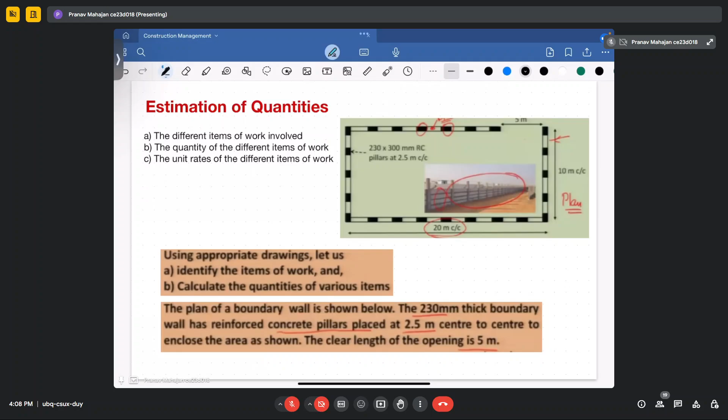So the clear length of the opening, so that a gate can be provided, is provided as 5 meters. So this is an illustrative example that you have covered in the current week, or the just-completed week. If you have seen all the videos, you must have seen how the estimation of quantities related to that is carried out.

So these are the side views of the boundary wall that you can see. Wherever you have a masonry wall in between, this is the sectional view of the masonry wall, wherein you can see that you will be having a 230 thick wall on which 15 thick plaster is provided in the ratio of 1:6. Then you have bed joints that are also provided with mortar in the ratio of

1:3. At the top, you can see this angle section in which four holes are provided. In these four holes, the barbed wires will move from one section to another, and then it proceeds further. You can see the foundation also. So this is the foundation that is provided.

In this, the bottom layer is PCC in the ratio of 1:4:8, over which you will be having the brick masonry foundation, with a first offset of 25, and then a 100 offset is provided over each step. So this is the cross-sectional view of the boundary wall, from which the estimation of quantities will be carried out. Another sectional view available for you is the sectional view of the RC pillar

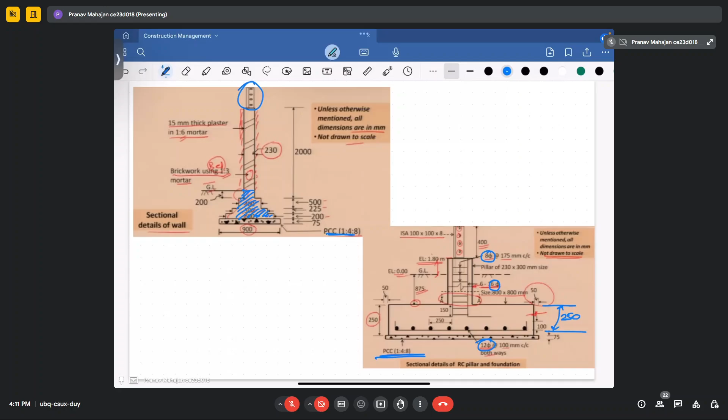So additional information provided to you is that, for this project, additional features are also mentioned in the drawing. It is mentioned that excavation is carried out by allowing 200 mm on both sides. So you must see that 200 mm should be provided on both sides of the section.

Whenever you are constructing a footing, an additional 200 mm is provided so as to provide a pathway for placing the PCC and to move the mason from one place to another in that section, so that the work can be carried out easily. Whenever you do the excavation work, you will not do exactly whatever specification is provided. You will do certain additional things, and then you do the backfilling, so that the work is done precisely and efficiently.

So the additional cost involved in carrying out such work is also included in the item of that work. It is mentioned that all the concrete work should be M25, and these pillars should also be plastered. Another thing provided is that you will have footings for the pillars of 800 by 800 mm. A clear cover of 40 mm is to be provided, and the original and final ground levels on both sides of the boundary wall are the same.

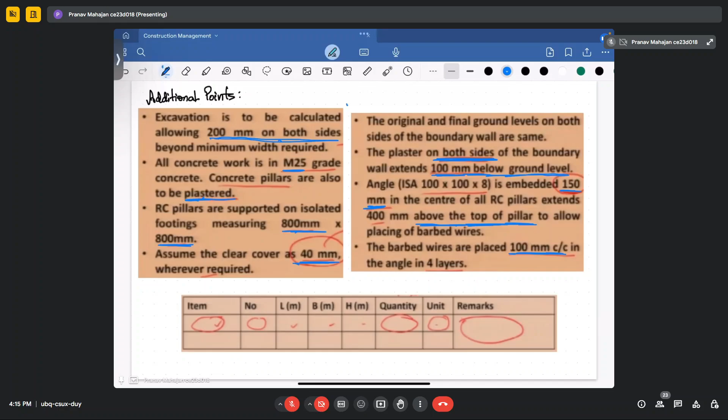So these additional features will help us to determine the quantities that are related to that particular work, so that proper estimation of the work should be carried out.

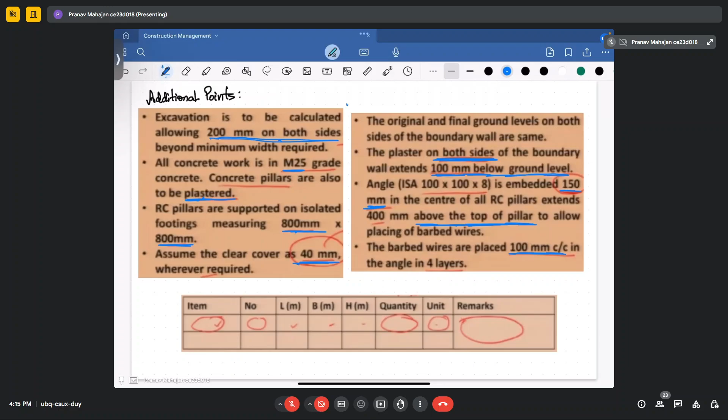So this is the table that you are required to complete. First you will have the item, the work that you will be carrying out, then the number of quantities, then you will measure its dimensions - length, width, height - and then the total quantity, which you multiply with the unit rate to determine the total cost involved to carry out that particular item.

So for this particular work, you can see the various items that are involved. First is excavation. To make the boundary wall as well as its foundation, you have to first excavate the ground. So the first activity required to be carried out is excavation.

Then at the bottom you are required to provide 75 thick PCC. So the PCC is provided. Then the third work is brickwork - you have to make the boundary wall as well as the foundation brickwork made up of masonry. So brickwork is the third item.

Fourth work is concrete work, for the RC pillars that are required to be constructed. So concrete pillars is another item. After making the concrete pillars, the brickwork is completed.

Then another work comes into picture - plastering work. Plastering work is also required, and during the RCC work that is going to be carried out, you require shuttering also. Then at the top, barbed wire is to be provided.

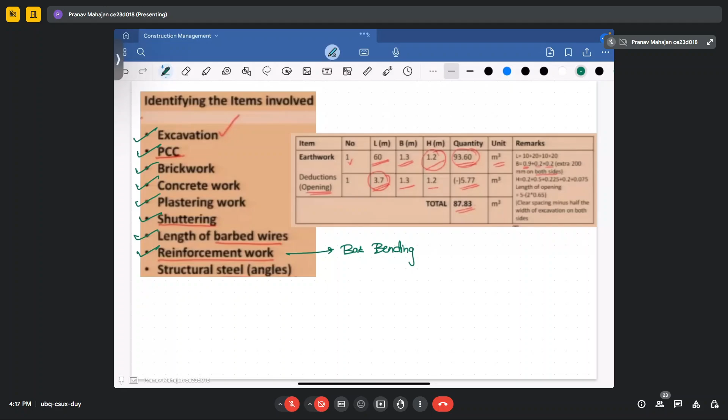So what is the length of the barbed wires, how much reinforcement is to be provided in the RCC columns - that we will determine through the bar bending schedule. And then at the top, the structural angles over which the barbed wires will move from one place to another. So how will you determine the earthwork?

So you can see an example of how the earthwork is done. This is the calculation of the previous boundary wall that is provided to you.

So in this you can see the total number is one, and the total length is 60 meters. How does 60 meters come into picture? You can see that 10 is the width of the section and 20 is the length of the section. So if you calculate the whole perimeter, you will get to know that it is 60 meters.

Next is width. Its width comes out to be 0.9, which is the total thickness of the foundation required to be dug out, and 0.2 is the additional offset provided at the additional points. So the total width to be excavated comes out to be 1.3. And then the height - you can make this out by adding the PCC thickness, the footing thickness, and the amount of column embedded inside the ground level. So the total comes out to be 1.2 meters. That gives you, if you multiply all of them, a total amount equal to 93.60.

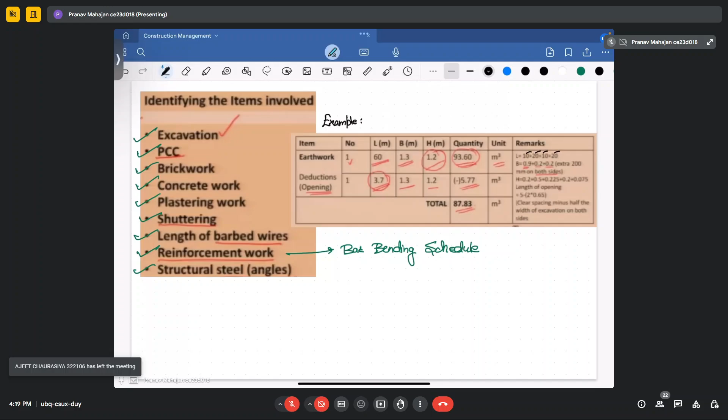So this we have done - now we have completed the earthwork calculation.

Now you will be having the RC pillars. So similarly for RC pillars, how will you be doing that? If you see the drawing, you will see there are 23 RC pillars, and corresponding to that, 23 RC footings. You will have a length of 0.23 meter, width of 0.3, and 2.675 as the height of the RC pillar. This is the activity required to be calculated by the estimator, so that he can know the total quantity of work.

If I just read these out, it may seem boring, but in actual calculation, each and every precise thing is required to be done. We will see one example later of how estimation of quantities is done. Here you can see the actual height is 1.8, and you add 0.875, so the total comes to 2.675. Similarly, footings are also calculated.

Then another thing that comes into picture is PCC, so the PCC calculation is also done. The PCC calculation is done for the whole length, but you deduct the opening for the gate. So the total PCC calculation comes out to be 3.78 meters.

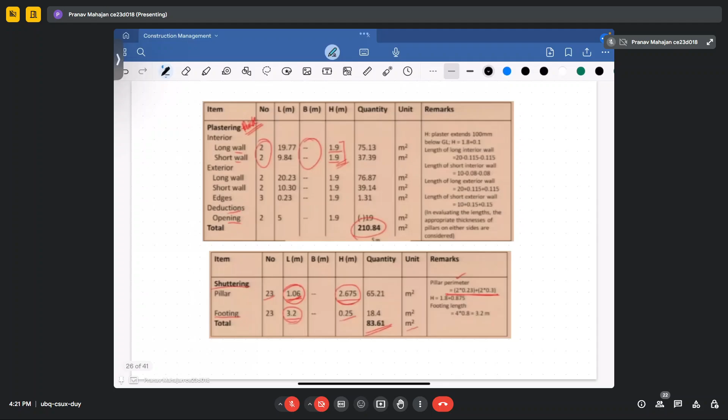After that, you have another category to complete, which is plastering. Plastering in this case is provided both inside and outside the section, so we use the long wall and short wall method. Plastering on the long wall is done and its calculation is provided. Please also note that the units involved are important.

For earthwork, we have taken the unit to be meter cube. For concrete work, the units are meter cube. For brickwork also it is meter cube. However, for plastering, since the thickness of plastering is already provided, the units used are meter square. So after doing all the calculation, the plastering quantity comes out to be 210.84 meter square.

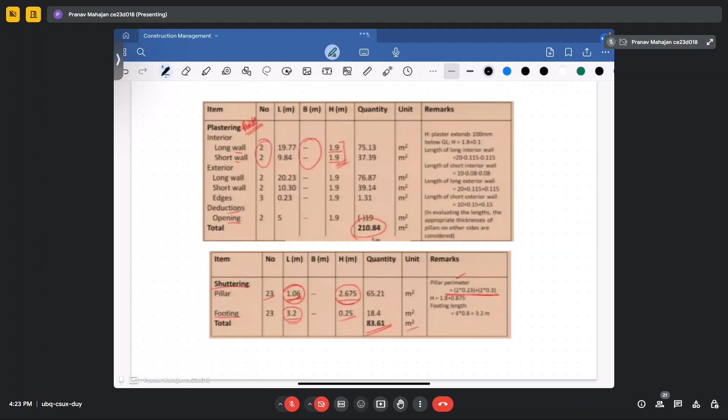Then comes the shuttering. Before concreting of the RC pillar is done, shuttering is to be provided, both in the pillars and in the footings. There are 23 pillars, so based on the pillar perimeter as well as the height, the shuttering calculation is done in meter square, and it comes out to be 83.61 meter square.

So the total estimate of that certain project involves estimation of the quantities as well as estimation of the rate corresponding to each particular quantity involved. This estimation of quantities is carried out based upon the drawings provided as per the approved engineer in charge, and then the rates could be estimated using standard rates such as the Delhi Schedule of Rates, CPWD rates, or USSOR rates, or by using rate analysis.

So how is rate analysis to be done? You take the raw items and see how much is the total amount of work and total cost of work required for a particular item, and then do the major analysis. This largely depends upon the type of specifications involved in the work, and how the work is to be executed.

In the BOQ, you are required to provide the description of the items that are required to be performed for a particular quantity. So suppose earthwork is to be done - you will not just say that earthwork of this much quantity is to be performed. You will say that earthwork using manual diggers or hydraulic diggers is to be carried out for this much area with certain amount of lead and lift, in that particular kind of rock or soil, and how much with all the finishes, labors, and other miscellaneous things involved in construction. That is how description is to be provided.

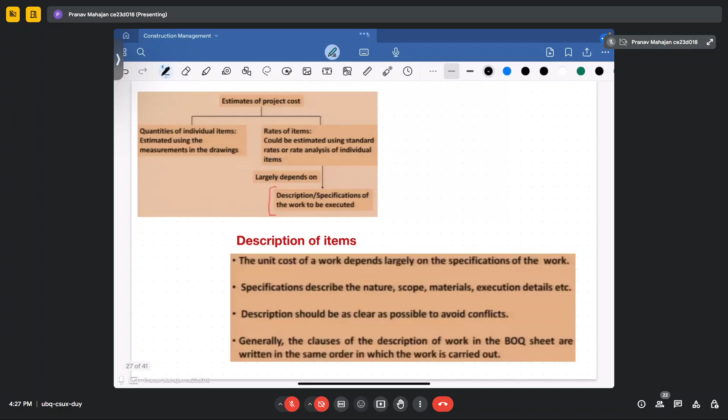The construction activities, as I already told you, involve excavation, brickwork, concreting, plastering, reinforcement, and many other things to be done. So how is this description to be provided in the BOQ in the tender document?

Let's see an example where it is mentioned that earthwork in excavation includes the dressing of the sides. That means if you are making a section, it should not be rough - you should make the section finished using ramming of bottoms. If water table is there, dewatering will also be included, providing timber shoring so that the earthwork will not fall from the sides.

And if necessary, with lift up to 2 meters - so this is your lift - including getting out of the excavated soil and disposal of excavated soil as directed, up to lead up to 2 kilometers. So this disposal is to be carried out as per this description of the earthwork provided to you. Everything is covered here, even the cost of disposal of the earthwork or mud - whether you are doing the disposal or not, the cost bearing to that will be provided to you.

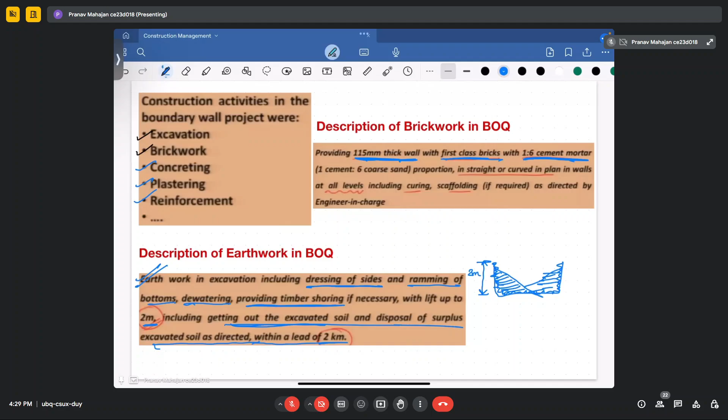So this is how the description of the work is provided in the particular BOQ of quantities. As I already told you, estimation involves quantities as well as the rates of the work to be done. However, this varies from item to item. Suppose you are interested in flooring - it could be either cement and concrete flooring, it could be Kota stone flooring, or it could be marble stone flooring.

So depending upon the type of the flooring provided in the description, cost of the item will change, and its impact on the total cost of the project will also be changed. So suppose it is provided to you that cement concrete flooring is to be done with floating coat, including cement slurry, excluding the cost of the nosing, and 40 thick with 20 nominal size stone aggregate is to be provided. So for that, you will be having the total cost to be 362.60, and you have a carpet area of 140. So that accumulates the total cost to

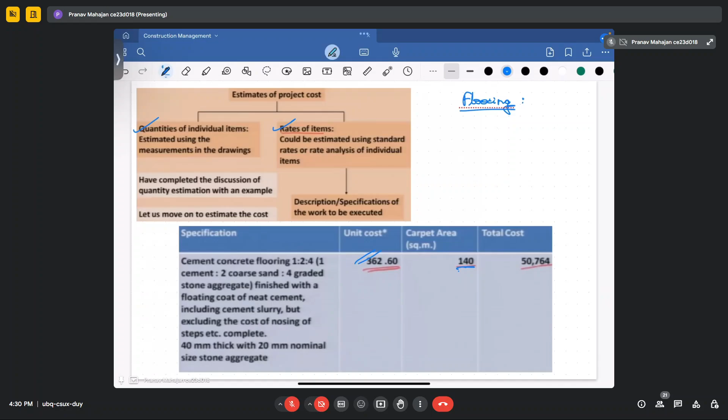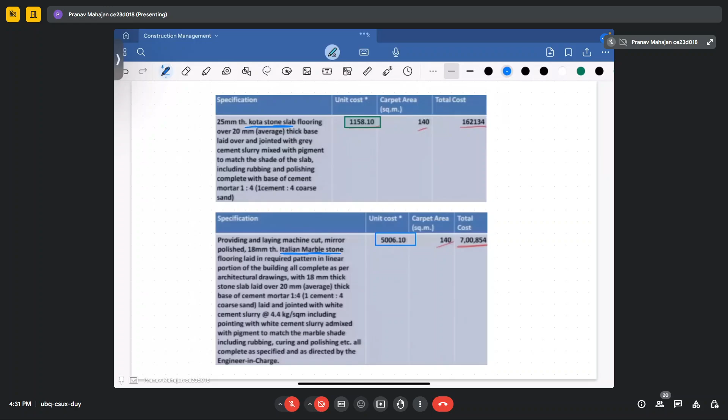50,764. However, when you will be doing the work with Kota stone, or if you see here Italian marble, the cost differs. So in Kota stone, if you see, the cost is 1158.10, whereas in marble stone it is 5006.10. So compared to Kota stone, it is almost 5 times the cost. So if you compare the per unit cost, for cement concrete flooring it is 362, Kota flooring it is 1158, and for marble it is

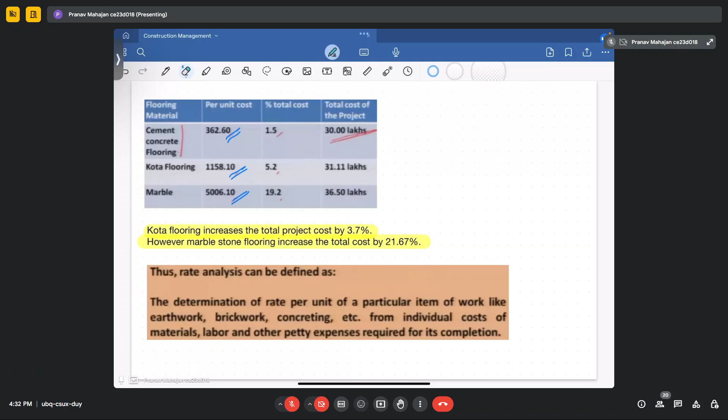5006. And it accumulates to different percentage of cost depending upon the per unit cost of the structures. So as you can see, the Kota stone increases the total cost of the project by 3.7%, and the marble stone increases the total cost by 21.67%. So rate analysis helps us to determine rate per unit of a particular item of the work, like earthwork, brickwork, concreting, from the individual cost that will be accumulated based upon the materials, labors, as well as the miscellaneous things that are involved for the completion of that particular item.

So the rate of an item depends upon the type of the specification of the material. Then it depends upon the proportion of the material that is required, then amount of labor that is required to do that particular work. Construction operations, that is mixing, bending, placing, excavating, should also be included. And finally, another thing that comes into picture is the profit. So profit should also be there for a particular item, which will be helpful for the contractor to do the particular work. So this work should also include material, labor, tools and equipments, water charges and overhead expenses.

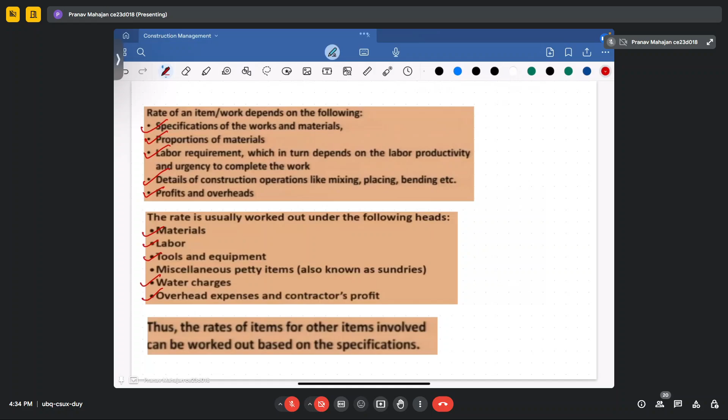So thus the rates of the other items involved can be worked out based upon the specifications. So specifications is the most important thing, so that the rates of the particular item could be carried out. So suppose you are doing a PCC work in which you are not provided with the specification, then how will you determine the rate? Suppose the client has provided the rate based upon 1 is to 3 is to 4, whereas the contractor thinks that the rate is for 1 is to 1.5 is to 3. So when it comes to site, there would be contradiction between the two about what kind of PCC we will place in that particular area. So these things should be avoided.

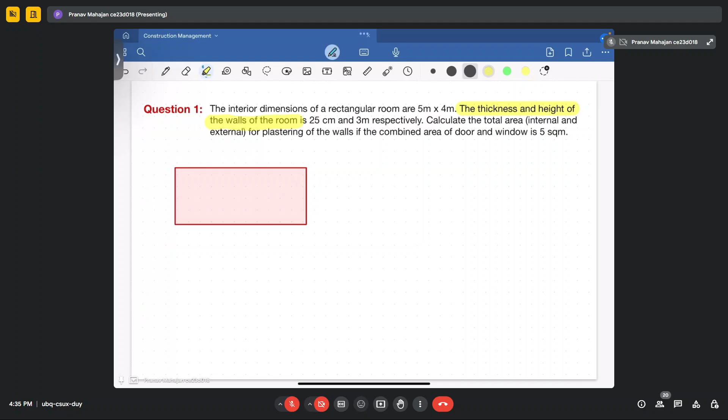So this is what you have covered in this particular week regarding the estimation of the quantities as well as the rates. So now let's have some examples, so that you will have clarity of the information you have covered in this current module. So let's get started. In this question, it is mentioned that the interior dimensions of a rectangular room are 5 meter by 4 meter. So let's make a diagram. So this is the interior of the room. Then the exterior of the room is also there. Let me remove this. So it is mentioned that the thickness and the height of the walls of the room are 25 centimeter and 3 meter.

So I will make another box that will show you. Okay. So this is your internal dimensions. If I mark them, that will be 5 meter, this will be your 4 meter, and this is 25 centimeter. And total height is 3 meter. So in this, you are required to determine how much plastering should be done, excluding an area of 5 meter square for doors and windows. Okay. So the internal surface area we will now calculate.

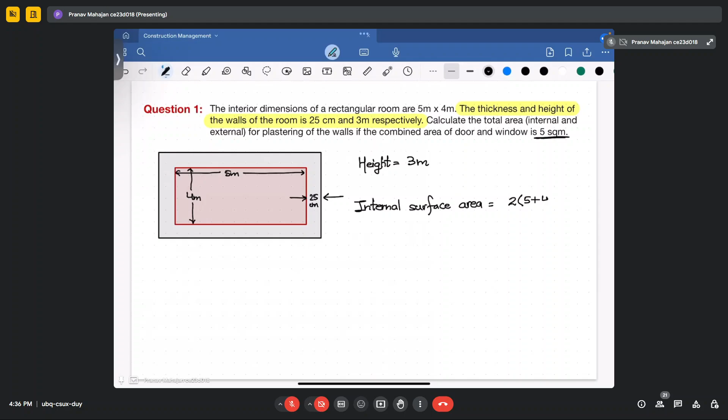That will come out to be, so first we will be calculating the perimeter. 2 into (5 plus 4), multiply by 3; 3 is the height. That comes out to be 9 into 2 is 18, 18 into 3 is 54. So 54 square meter is your internal surface area.

Now talking about external surface area, your external surface area will include the thickness of the wall also, that will be 5.25. It will not be 5.25. It will be 5.5 plus 4.5, multiply by 2 into 3, because you will be having two walls of 5.5 and two walls of 4.5, and then you will multiply by height. What you will get? You will get the total surface area equal to 60 meters square.

Now the area to be deducted for doors and windows amounts to 2 into 5 meters square, that will be equal to 10 meters square. Okay, so your total area for the plastering will be equal to 54 plus 60 minus 10, that amounts to 104 meters square.

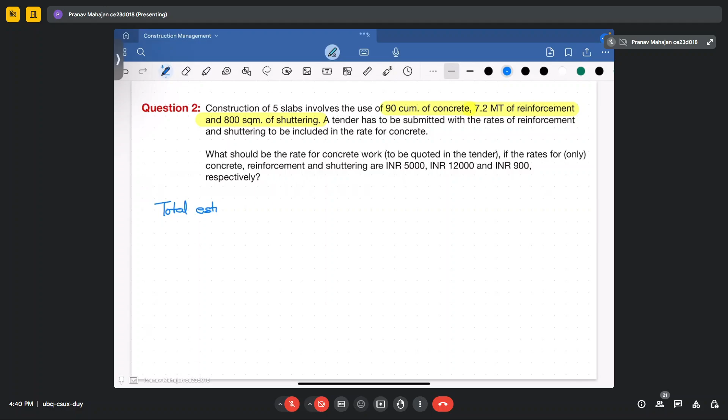So your total estimated cost will include concreting cost plus reinforcement cost plus shuttering cost. That amounts to quantity 90 multiplied by the corresponding rate of 5,000, plus for reinforcement 7.2 with per metric ton rate of 12,000, plus 800 for the shuttering multiplied by the corresponding rate. So in this case you will get the value as 45,

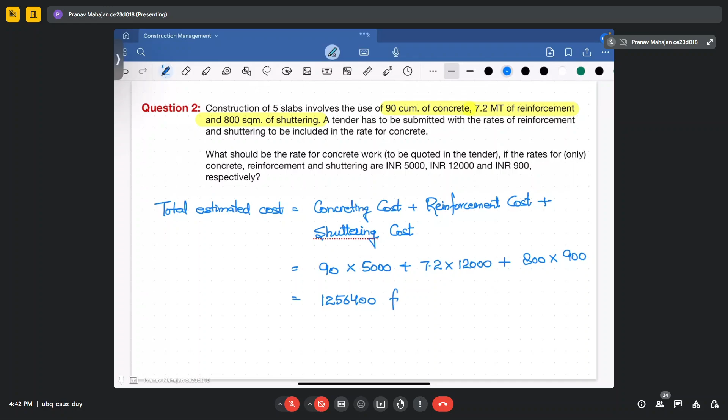This amounts to, so that is 90 m cube, put 900. Right. Sorry. Oh yeah, it's 90 cubic meter. Yes, 90 cubic meters. So it comes out to be this much, the cost for total concrete consumption. So this is the cost for 90 cubic meter of concrete.

However, if someone asks you what will be the rate to be quoted, that rate should not be quoted for the 90 cubic meter. It will be required per meter cube. So rate for concreting work will be 1256400 divided by 90, and it amounts to 13,960. So this is how rate calculation is done in this case.

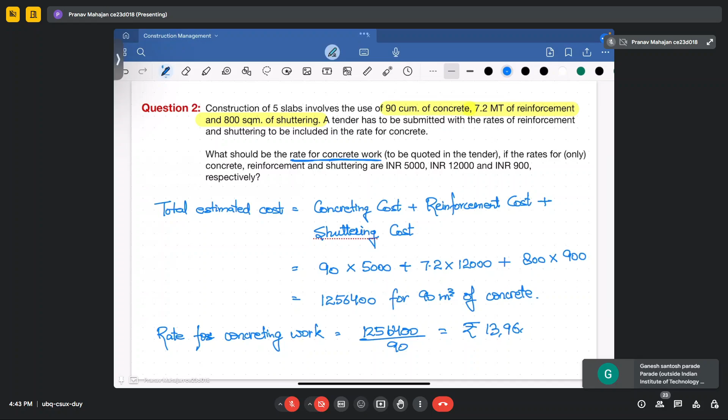Now we will do a one big problem with an RC frame structure. Let me read this question first. Consider the following details for the construction of foundation of an RC framed structure. You will be having one raft foundation of 500 thickness, measuring 10 by 10 meters. The bottom of the raft foundation is at a reduced level of 97 meter, with the surrounding ground taken as 100 meters. So this will give you the total depth of the footing, that will be 3 meters.

However, PCC will also come into picture below the raft foundation. We will see in the coming points. Third point is that 8 square columns of 500 side rise from the raft going to the top of the building, with the top of the column being at a reduced level of 105 meter.

So above the ground level, you will be having the square columns of 5 meters. Now in these square columns, reinforcement is to be provided. So first is for the raft. In the raft, reinforcement is to be provided as 20 bars with 150 center to center distance in both ways, both at the top as well as the bottom, with clear cover of 50 on both

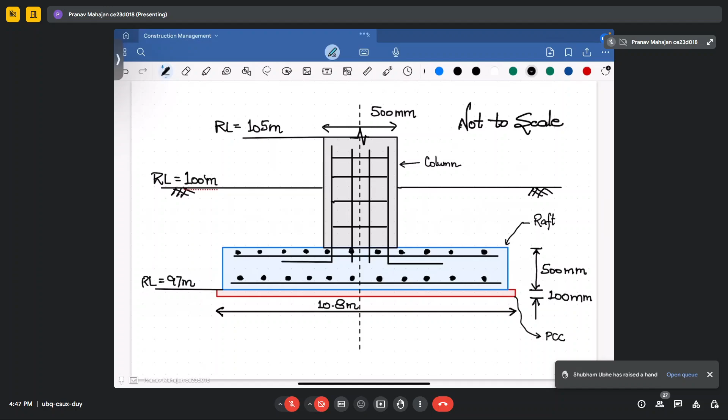So now you are required to calculate what is mentioned in the coming portion. So I have made a general overview of the drawing that is required to be calculated. So you can see that at the bottom, this is the PCC layer that is to be provided of 100 thick, over which raft foundation is to be done. So this is your raft, and then column will come into picture. So this is how you are required to make, and then you may make the further dimensions.

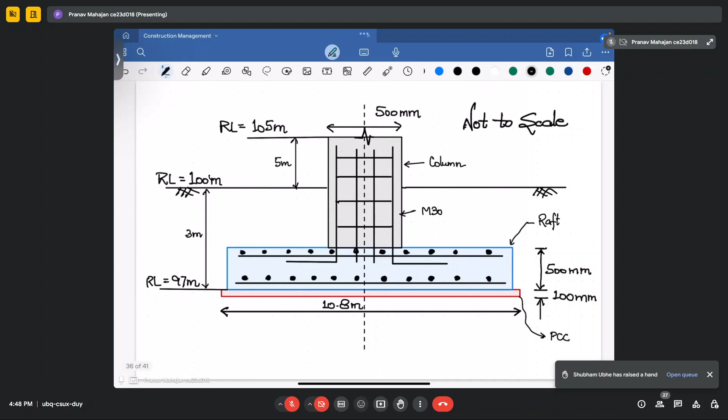So this 97 and 100 will give you the total thickness of 3 meter plus 100 mm. So your total depth of the footing is 3.1 meter. Then it will give you that the total height of the column will be 5 meter. The rest, the internal details regarding the reinforcement are provided to you. So this is M30 concrete. Your column is M30, and your raft is M20. These bars at the bottom that are provided for the dowel action should extend up to 500 mm. So these dowel actions will be for 500 mm.

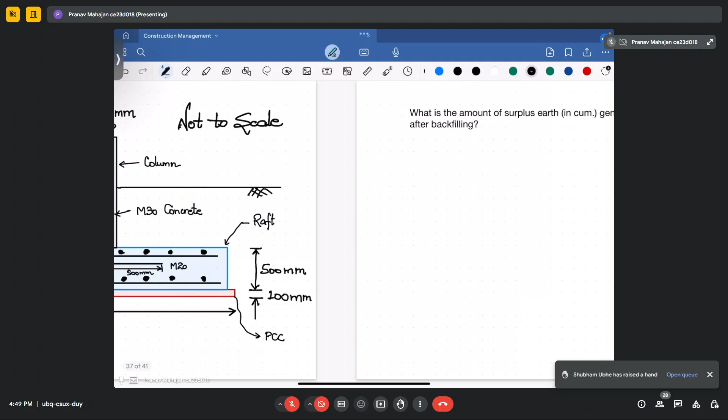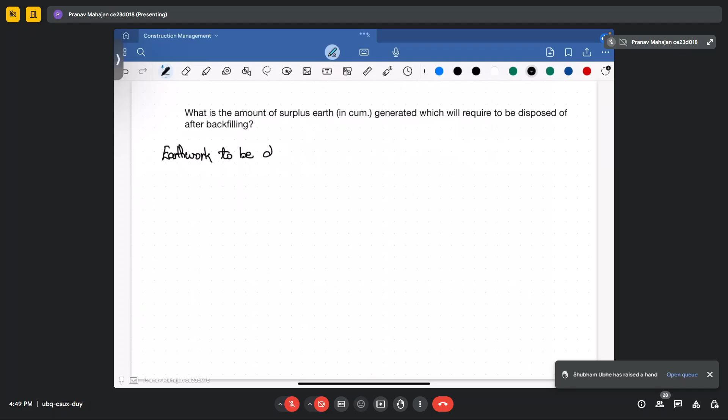Okay. So based upon the type of information provided and what calculation is asked of you, you have to do that particular thing. So for the first thing, it is asked what is the amount of the surplus earth that will be generated and will be required to be disposed of. So the earthwork to be disposed will include the part of the picture that is coming into the section. That means this part, this part, and this PCC part. So this much amount only is the surplus that is embedded inside the soil after excavation is done.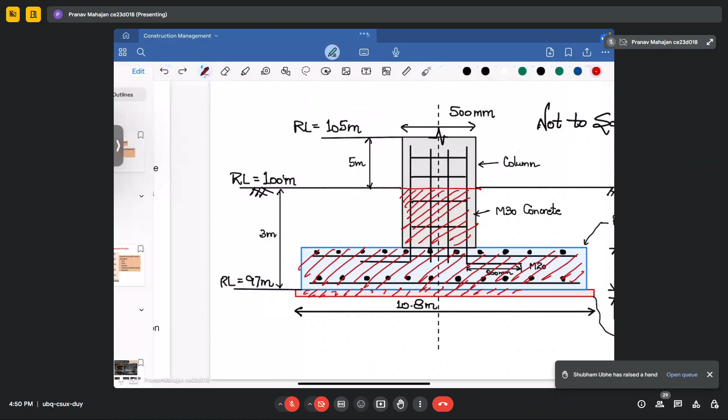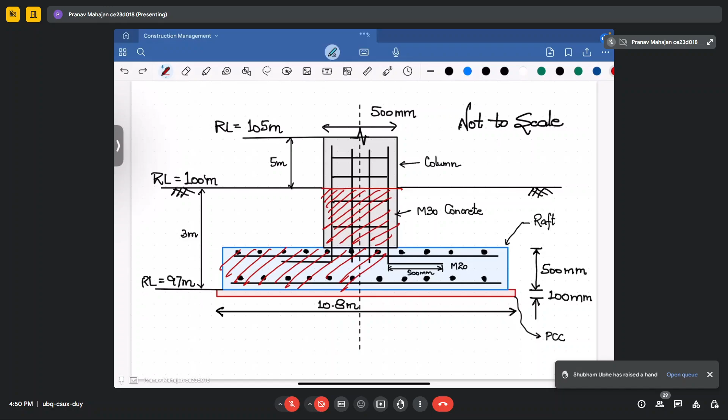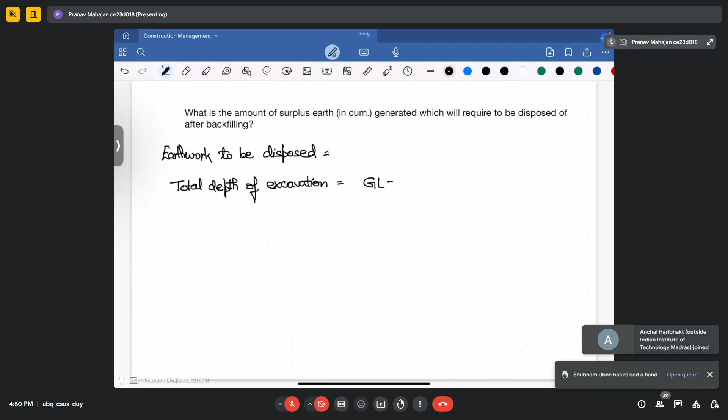So let me remove this first. So this is what we are required to calculate for the estimation of the earthwork quantity. So for this, your total depth of excavation will be equal to ground level minus raft bottom level, plus it will include the PCC thickness. So how much it amounts? It amounts 100 minus 97, plus PCC thickness of 0.1. So your total depth of excavation comes out to be 3.1 meter.

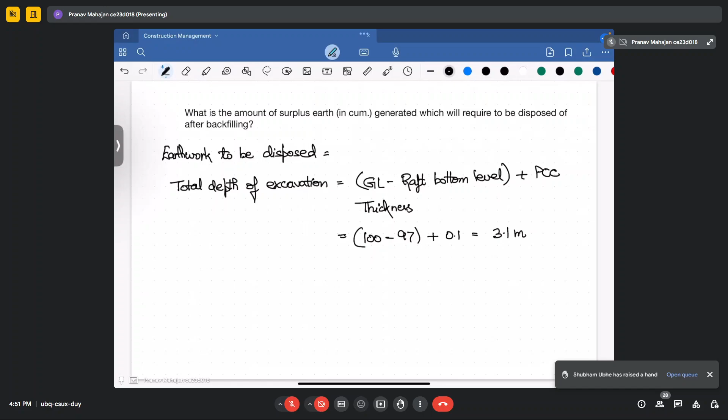Now your dimensions of the raft will be 10 meter by 10 meter by 5 meter. If you can see from the figure, this is your raft. It is 10 meter up to this point, and it extends in another direction 10 meter, and its total height is 5 meter. So not 5 meter, it's 0.5 meter because it is 500 mm. This is 500 mm. So it is 0.5.

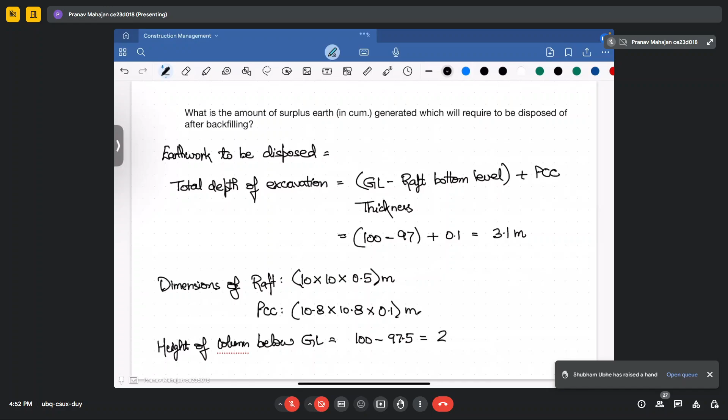So 10 into 10 into 0.5 meter. Now talking about the PCC dimensions. So your PCC dimensions come out to be 10.8 into 10.8 into 0.1 meter. So next is height of this column below the ground level, and that will be equal to 100 minus 97.5, and it will be equal to 2.5 meter. Okay.

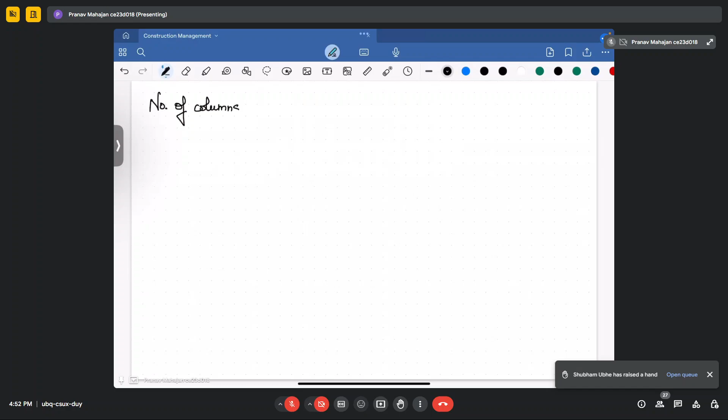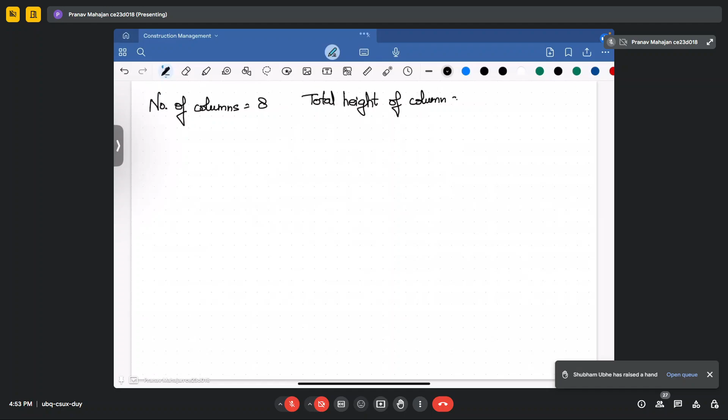So for the columns, the number of columns to be provided is 8, and you have total height of the column including the ground level height also, that will be 105 minus 97.5. That is just a subtraction of the RLs that are mentioned in the figure. That will be equal to 7.5 meter.

Now, how will we calculate the surplus earth that is required to be disposed? So, surplus earth to be disposed will include volume of PCC plus volume of raft plus volume of column below ground level,

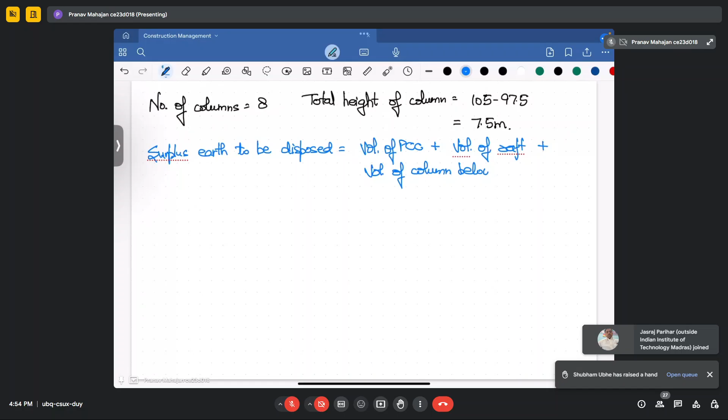and that will be equal to, for PCC we have calculated it as 10.8 into 10.8 into 0.1. For raft it is 10 into 10 into 0.5, plus for column, we have 8 number of columns, 8 into 0.5 into 0.5 will be the dimension, and its total height below the ground level is 2.5 meter. And if we calculate this, it amounts to 66.67 meter cube. Okay, this is how you will calculate the surplus earth required to be disposed.

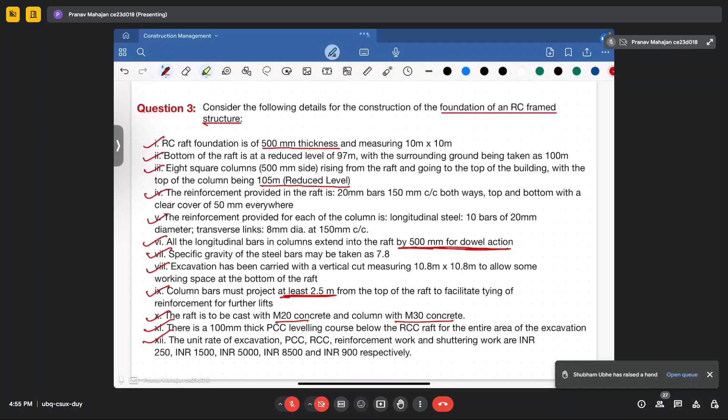So now what is the next question? The next question asks, what is the minimum amount of reinforcement in metric tons that is needed to be procured for casting of raft. So in raft, you can see it is mentioned that the reinforcement to be provided is 20 bars at 150 center to center both ways, and 50 cover is to be provided. So we will calculate the reinforcement for the raft. How we will do that? In this, we are provided with the 20 bar.

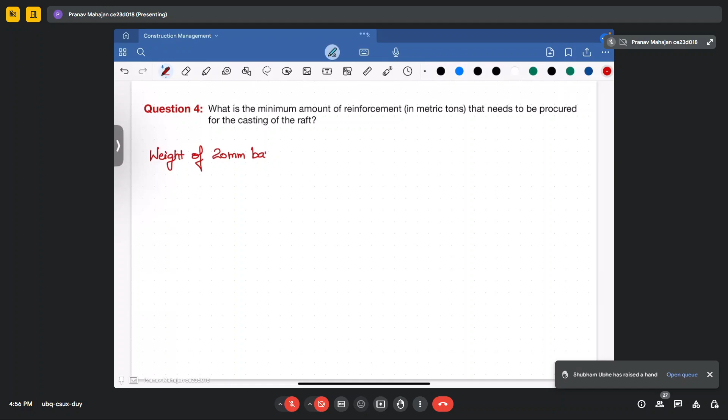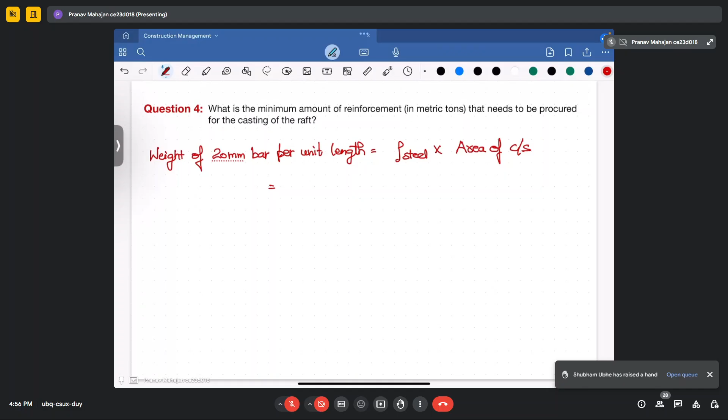So the weight of 20 bar per unit length will be equal to density into volume, okay, into area, because per unit length we are considering area of cross section. Now density is provided to you as 7.8 into 1000. Multiply by the cross section area of the bar, that will be pi by 4 into 20 square, and since these are in mm, we will make it in kg. So that amounts to 2.45 kg. So per unit length, the weight of the bar comes out to be 2.45 kg.

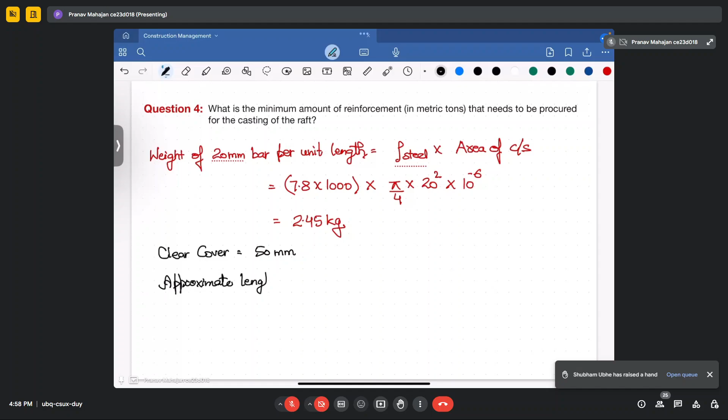So now you are expected to calculate the total length of the bar that is required to be provided in the raft foundation. So what will that be? In raft, clear cover is 50 mm, and you can assume the approximate length of the bar to be 10 meter, because the 50 mm cover is negligible, we can ignore that.

So the total number of bars to be provided will be equal to 10,000, because it is mentioned here that it is 10 meter, minus 50 cover, divided by the center to center distance, that is 150, plus 1. That will give you the total number of bars in one side. However, the reinforcement is to be provided both ways, as well as at the top and the bottom. So for that, we will multiply it by 4. So your total number of bars will come out to be 268.

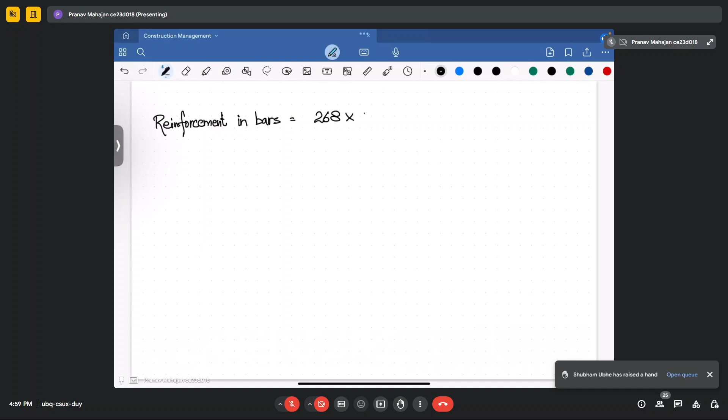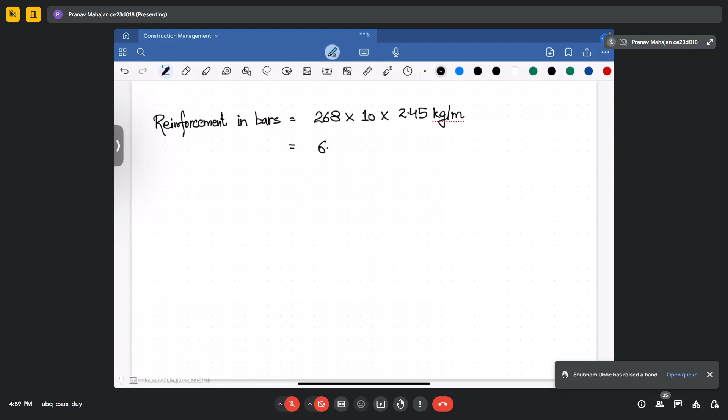Okay. So the reinforcement in raft is not expected in numbers. We are expected to give it in metric tons. So your total will be 268, the number of bars. For each bar, the length is 10 meter, and the per meter weight is 2.45 kg per meter. That gives you the total weight amounting to 6.566 tons. Okay. So this is how you will be calculating the reinforcement to be provided in raft foundation.

Now, what is the next question? The next question is the total amount of shuttering that is required to be done in columns as well as in the raft. Okay. So how will you be doing that? You will be calculating the perimeter of the column multiplied by the height. Okay.

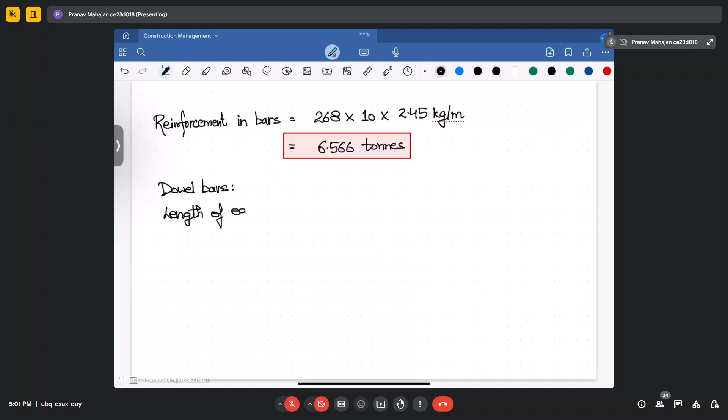Another thing that we have missed here is that in the raft there are L-shaped dowel bars also provided. So for dowel bars also we have to do the calculations. So for dowel bars, length of each bar will be 2.5 plus 0.5, amounting to 3 meters. And then total number of bars: for each column 10 bars are provided and you are having a total of 8 columns, so your total number of bars will be equal to 80.

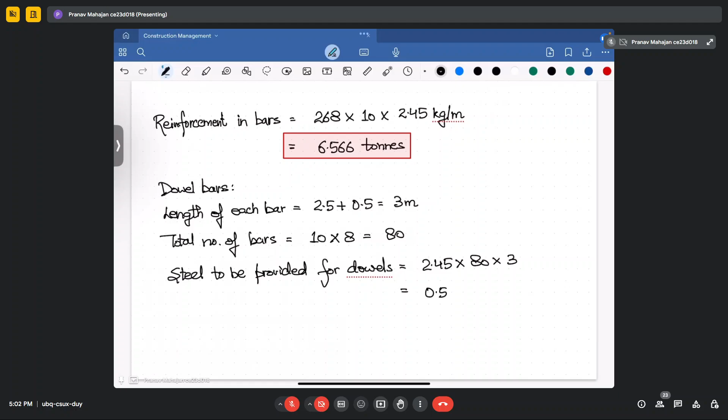So the steel to be provided for dowel bars will be equal to 2.45 multiplied by 80 multiplied by 3, and that gives you a total value amounting to 0.588 tons. And if you calculate the total steel required, it will be equal to 6.566 plus 0.588, equal to 7 tons approximately.

Length and stirrups per column also need to be calculated? No, we are calculating only for the raft foundation, not for the columns. So in the raft, no stirrups come into the picture. For the column calculation, stirrups will come. Okay. Okay, thank you.

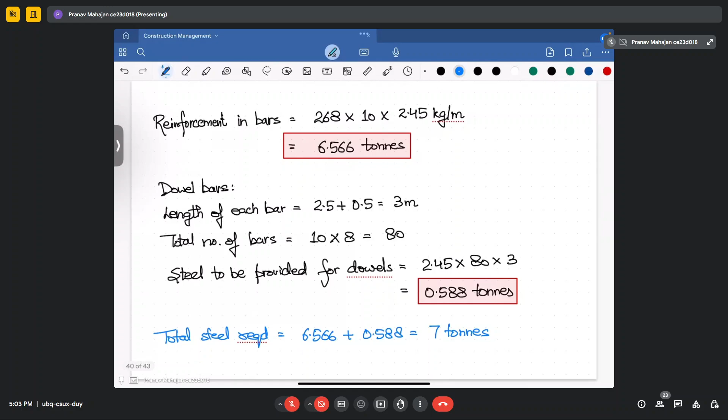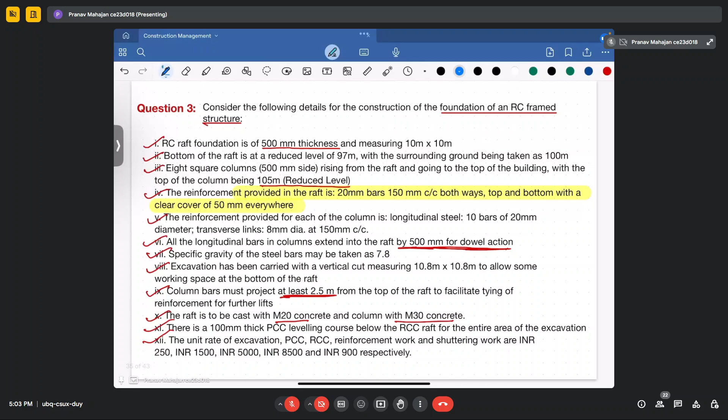So next is the amount of shuttering required in columns and the raft. Excuse me, sir, if the mat is a double mat, then some chairs are required, no, sir? Chairs are required, but we are ignoring the calculation for the chairs because that information is not provided to you. If chairs are there, that information should be given in the structure. So we are only considering the information provided in the points. Additional things we will not take into consideration now. Okay, thank you, sir.

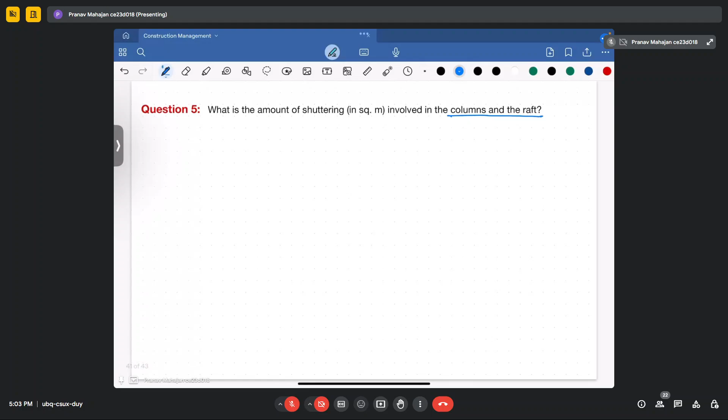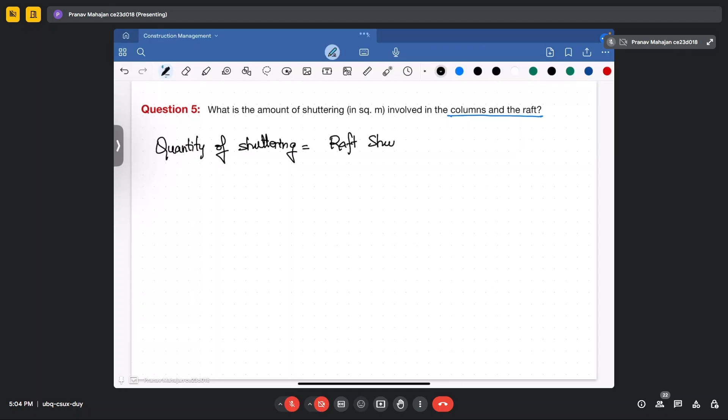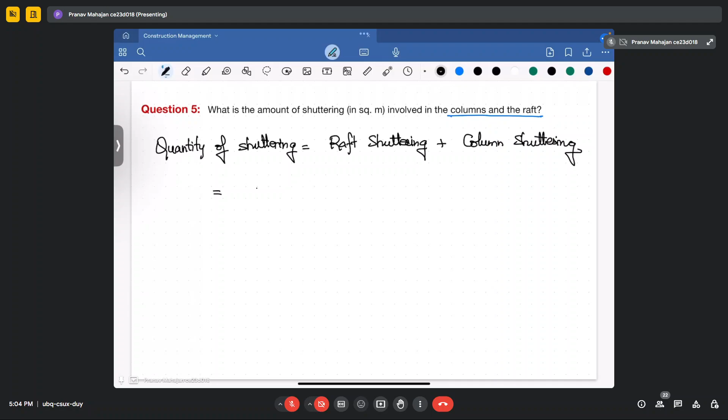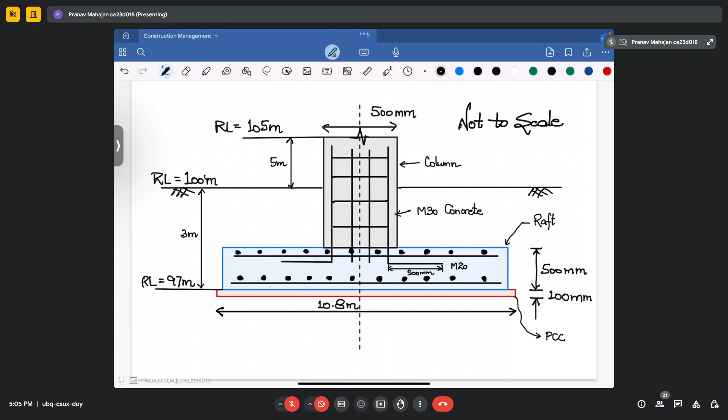So next is the amount of shuttering. The quantity of shuttering will be equal to raft shuttering plus column shuttering. For the raft, 10 is the dimension, so 10 into 4, multiplied by the thickness of 0.5. For the columns, we have a total of 8 columns multiplied by 0.5 into 4, which is the perimeter of the column, multiplied by the height of the column, 8 meters. That amounts to 148 square meters.

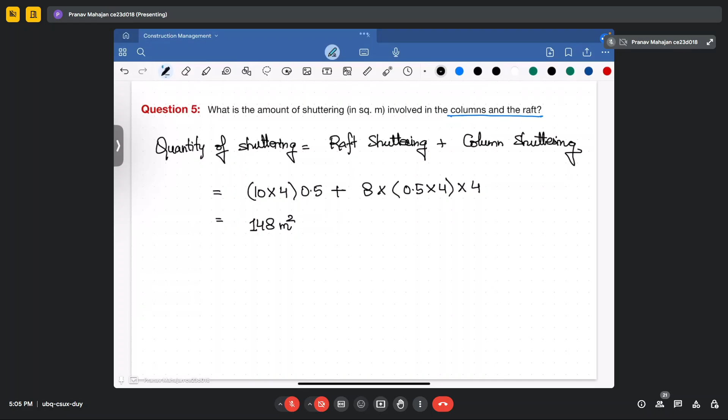Next, in this question, if the unit cement consumption in PCC, M20 and M30 concrete is 100 kg, 375 kg, and 350 kg respectively, what is the total cement consumption in the concrete work? You only have to calculate the volume and multiply it by the corresponding cement. First, for PCC, cement required will be 100 kg multiplied by the total volume, which is 10.8 into 10.8 into 0.1.

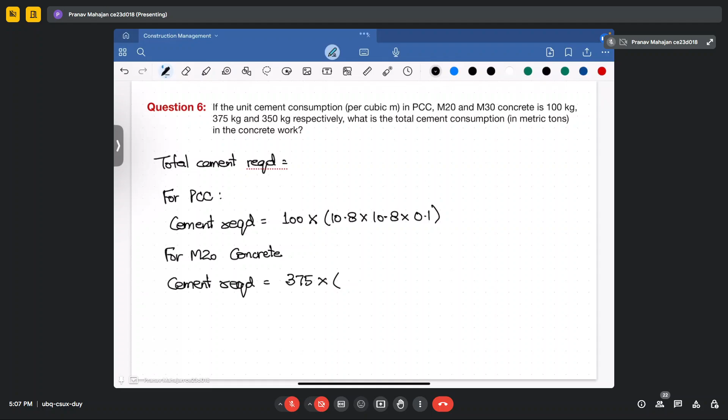For M20 concrete, cement required will be 375 into the raft volume; raft dimensions are 10 into 10 into 0.5. And for M30 concrete, cement required is 350 multiplied by the column volume: 8 columns multiplied by 0.5 into 0.5 into 7.5. So 0.5 into 0.5 into 7.5 into 8 into 350 is 5250 kg.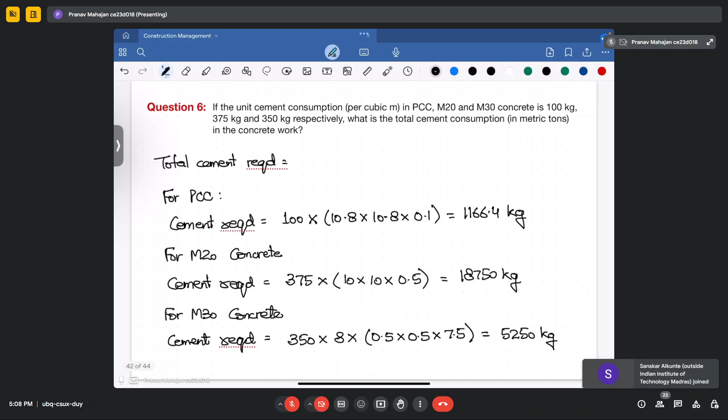In this case it is 18750 kg. In this case it is 1166.4 kg. If we add them all, your total cement required will be 1166.4 plus 18750 plus 5250, which gives a total of 25166.4 kg, or in tons, about 25 tons.

Okay, so this is how you will calculate the total cement required for the concreting work.

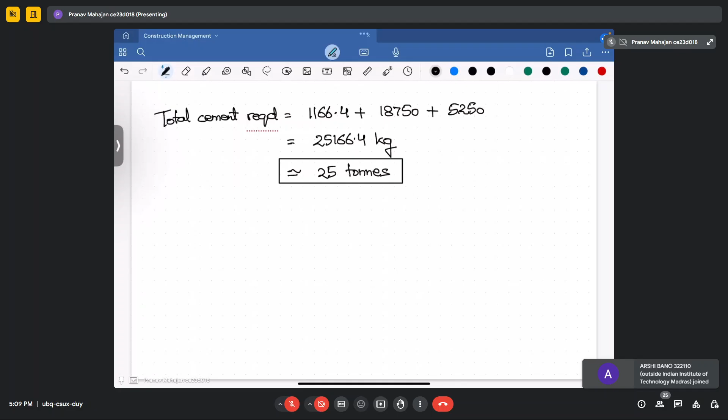Now next is, what is the gross amount payable at the end of the casting of the raft. In this case, we are calculating only for the raft. So for the raft, what are the things to be included? One is excavation, then PCC, then shuttering, then steel, and concreting. So then let's do this.

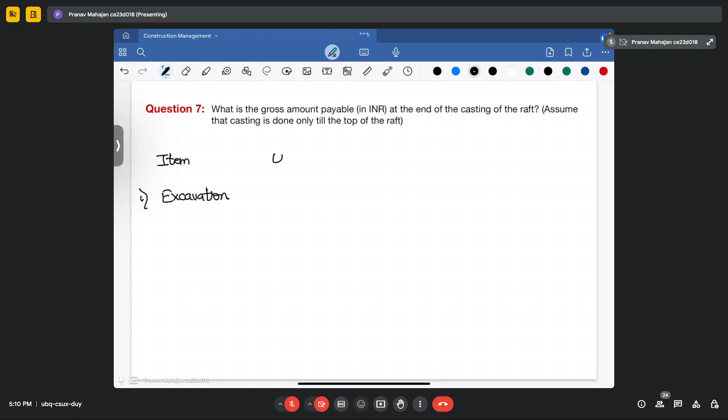So the first item is excavation. The total quantity of excavation will be 10.8 into 10.8 into total depth of footing, which is 3.1. That is equal to 361.6 meter cube.

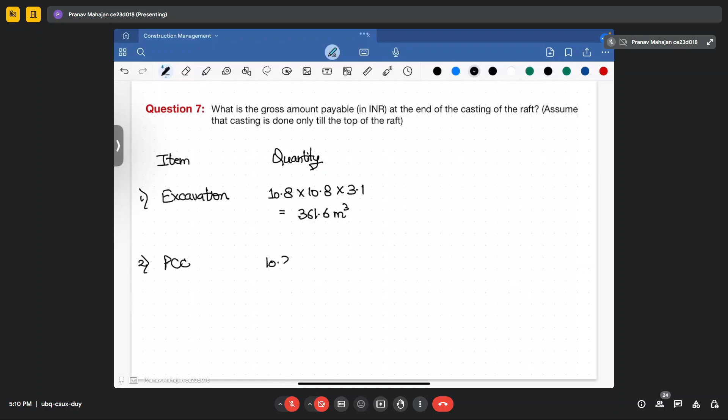Next quantity that you will take into account is PCC. PCC is 10.8 into 10.8 into 0.1, and that we have already seen, that is equal to 11.664 meter cube.

Third thing that comes into picture is shuttering work. Shuttering work is 4 into 0.5 into 10, that is the total length of the raft. That will be 20, and this will be in meter square.

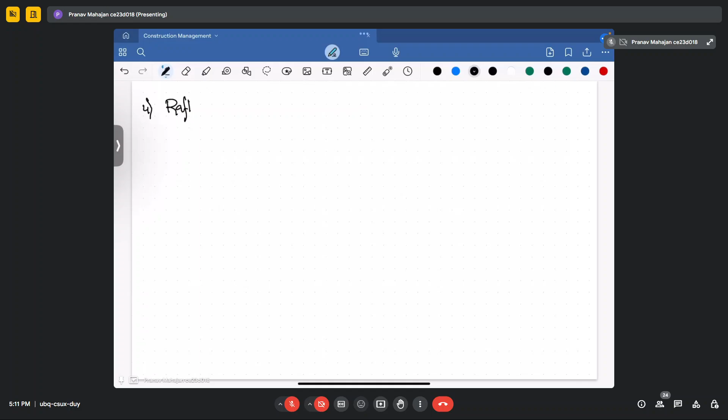Next is the steel to be provided in raft. So the raft steel, which we have calculated previously, is total 7 metric ton.

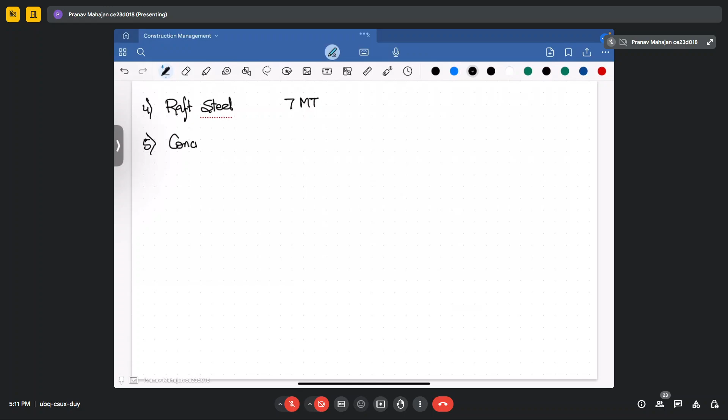And finally we will be having the concreting. So your concreting we will calculate as 10 into 10 into 0.5, that is the thickness of the raft, and it will amount to 50 meter cube.

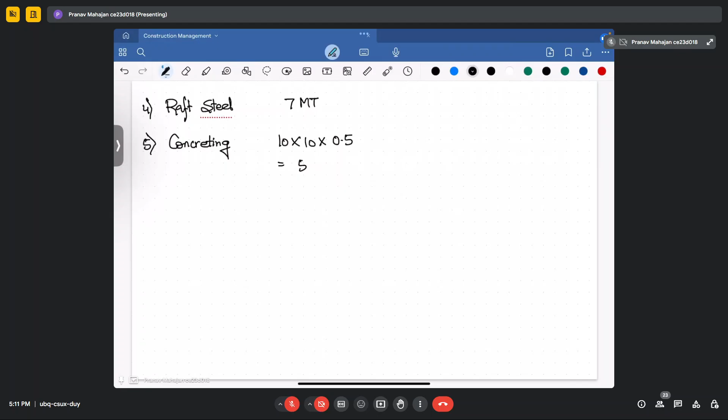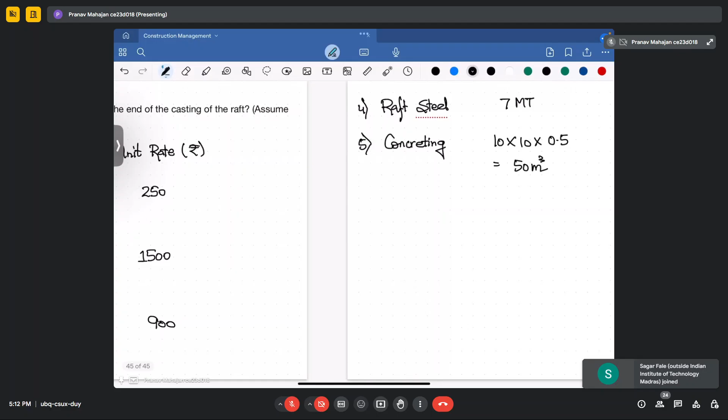If we take the unit rate of the items involved, that is in INR, so for excavation it is mentioned 250, you can cross check them later. For PCC, it is 1500. For shuttering, it is 900. For steel, it is 8500. And for concreting, it is 5000.

So for each item, your total rate or total cost comes out to be: for excavation, it is 90,400. For PCC, it is 17,496. For shuttering, it is 18,000.

Then you are having steel. For steel, it comes out to be 59,500. Then we are having concreting. For concreting, it is 2,50,000.

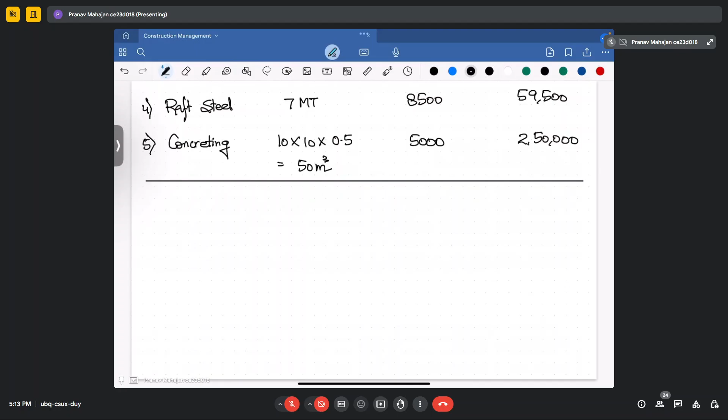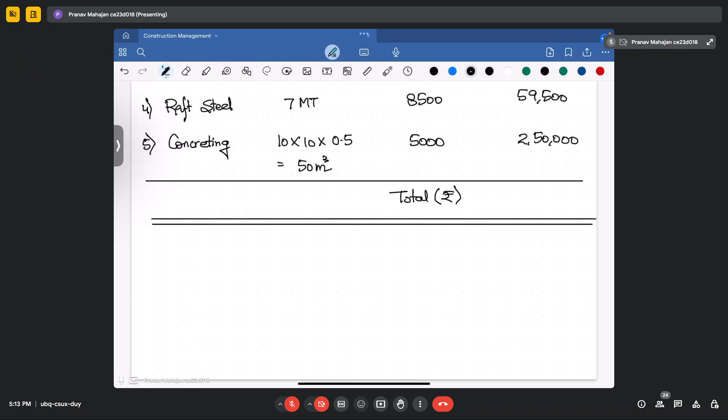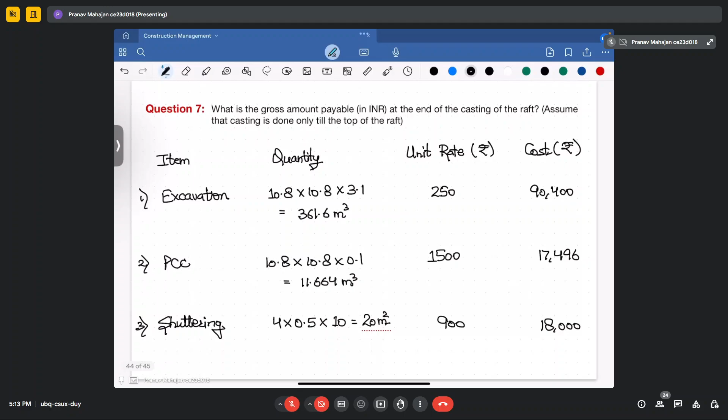Okay, if you do the total in rupees, this will give you the total amount required for the raft work, and that is equal to 4,35,396.

This is how you are required to calculate or do the estimation of the quantity as well as the rate analysis, and then determine the total cost involved in the construction of a particular activity or the total amount of the project required to be completed.

So this ends our second week, in which we started with the estimation of the quantities. We have seen how the quantities should be arrived at. For that, you must know the process involved for construction purposes: first excavation should be done, then PCC should be laid, then footing should be installed, and then concreting work and brick work should be done simultaneously.

And if some protection work or miscellaneous work is required, that should also be done. And how their cost estimations should be done based upon the quantities of the work involved in that particular work, how it is to be analyzed.

And if you are taking rates from particular schedules that are provided, like DSR, USSOR, or CPWD reference books, you can take directly the rate and then multiply with the total quantity involved in your project, and then calculate the estimated amount of the work required.